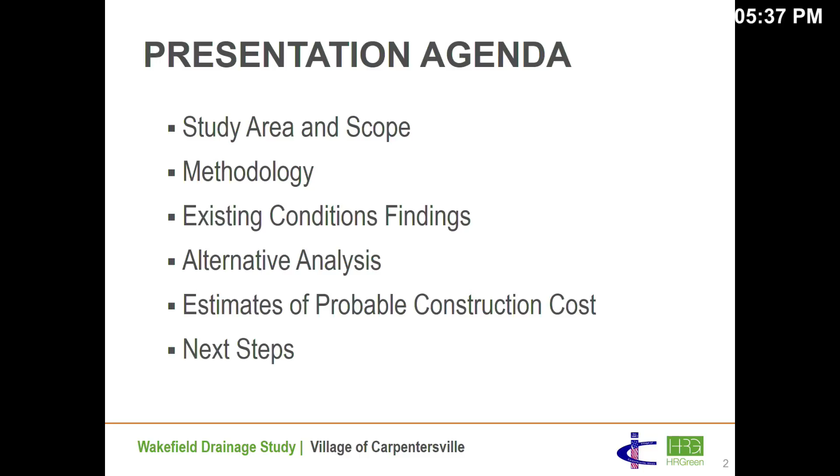So a little bit about what we will cover today: we'll go over briefly the study and the scope that was laid out for us, then discuss our methodology as to how we went about doing the study, present some findings on the existing conditions and some causes of why it floods, and some of the alternates we have looked at for you tonight. Then we'll present the different costs for the different alternates, and discuss the next steps as we move forward.

The study area we're focusing on today is the area of Wakefield and Bristol on the east side of the village, east of 25, north of Illinois 68. That star you see is really the epicenter of where the flooding is worst because it's the low point in the watershed.

All the water kind of just pools in there with no place to go, which we'll talk about more. What you also see in the pictures and on the cover slide is from the July 2017 storm event. As you can see, the roads were impassable, with about 2.2 feet of flooding in the road, so emergency vehicles and the motoring public couldn't get where they wanted to go.

From the modeling we'll present in the next few slides, this was about a 25-year storm event. You're probably aware of the different frequencies of flooding, like a 10-year or 100-year storm event — so this wasn't even a 100-year storm, it was a 25-year event. As the intensity, duration, and flow change for different storm events, the flooding can get worse.

What you also see on this map is the general tributary area, delineated by the blue line — that's how much residential subdivision area drains to that low spot. There are also some existing storm sewers, delineated in yellow, which all flow east into the village of East Dundee. That's important because when we talk about alternatives, what we can do will be limited by how much impact we can have on the neighboring community. So our intent was to have no impact at all as part of our alternative analysis.

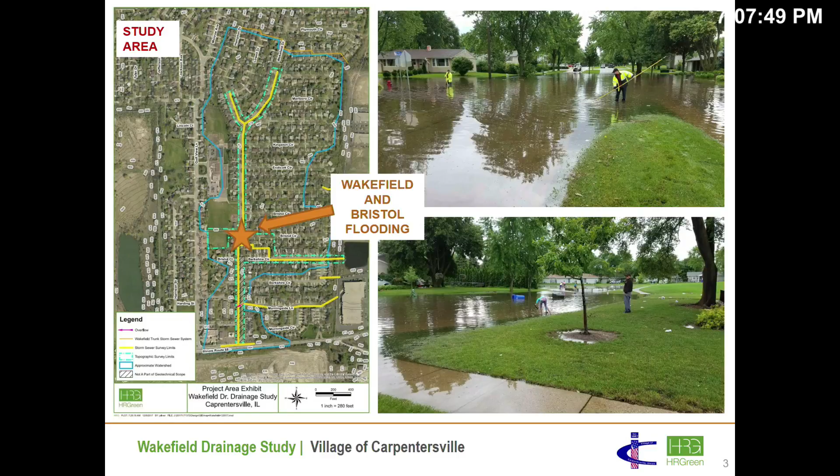Our scope generally comprised doing this study, which is what we're presenting today, and then presenting alternates for your consideration. Once you select an alternate, we'll take it to preliminary design, looking at it in more detail for utility impacts and so forth, fine-tune the construction costs, and then present the 30% plans as we wrap up this phase of the project.

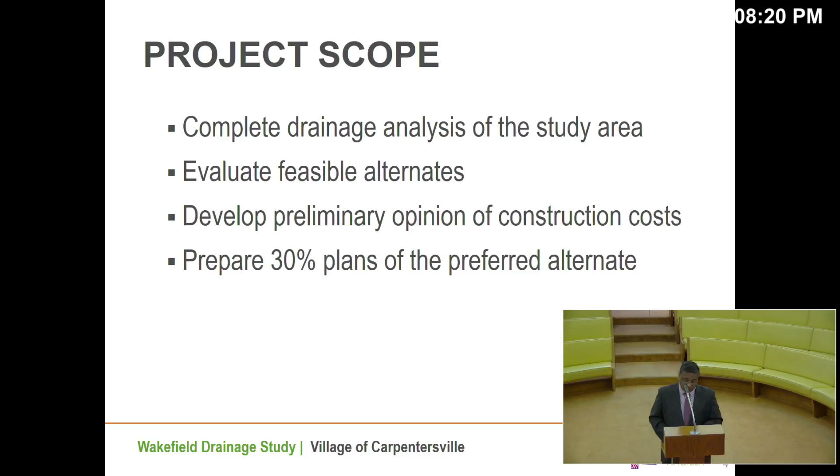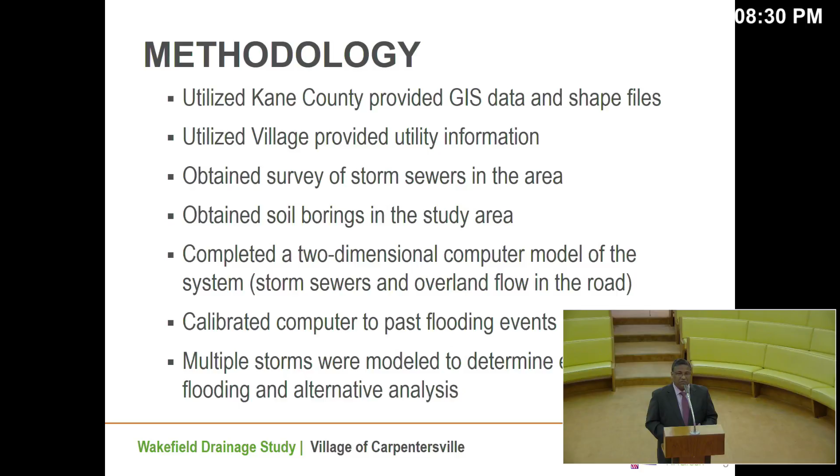As far as how we go about these studies — first, we try to look at and use readily available data. For example, the Kane County GIS data is readily available, which is helpful because we can get the aerials and topo and everything needed for our analysis.

The village staff provided us the flooding pictures you've seen — they went out there during the 2017 flood event, which was very helpful in calibrating the model we'll talk about. The village also provided us utility data in the neighborhood, but as you'd expect, we supplemented that with our own field survey.

We went out and collected field survey data on all the existing storm sewer systems, and also obtained geotechnical soil borings because we wanted to know the characteristics of the soil and whether there's potential to do something different with the flow, like dissipating it into the ground.

We also did a two-dimensional computer model — I'll present a good slide of that later. The flood depths we present require a two-dimensional model because we're not just interested in what's happening in the storm sewer, but also on the surface, in the road. As the storm sewer gets overwhelmed, where does the water want to go? What are the low points? Where is it overflowing? That's why it's called two-dimensional — you're looking both under the ground and above ground.

Before going into alternative analysis and looking at solutions, we want to make sure the computer model we're using is really good, because it's always garbage in, garbage out. If we're not confident in the model, then any solutions we present might not be validated to provide the relief you're looking for.

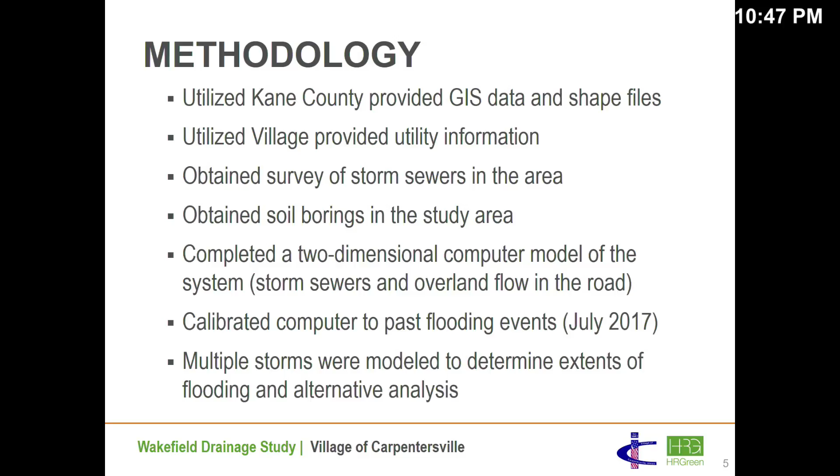So that was our general approach to looking at this. Let's look first at what happens in existing conditions.

So this is a 10-year storm, a smaller storm event than the July 2017 storm event. Before I present the inundation and what it means, there's a legend in your packet showing the different depths of flooding. As we run this model through different storm events, we look at how deep the water gets. In this instance, you can see it's about 1.5 to 1.6 feet at that intersection, represented by the legend.

As we go into other storm events, like this 25-year storm event, the depth gets deeper—about 2.3 feet of flooding in the roadway at that low point. If you ran the same model for the 100-year storm, you could expect as much as 3 feet or over 3 feet of flooding.

There are residential structures around that low spot in the intersection. Even though the July 2017 storm event was a 25-year event at about 2.2 feet deep, getting closer to the structures, none of the structures were flooded to our knowledge. But with bigger storm events, you could potentially impact the structures—we're within a tenth or two of flooding them in a 100-year storm event.

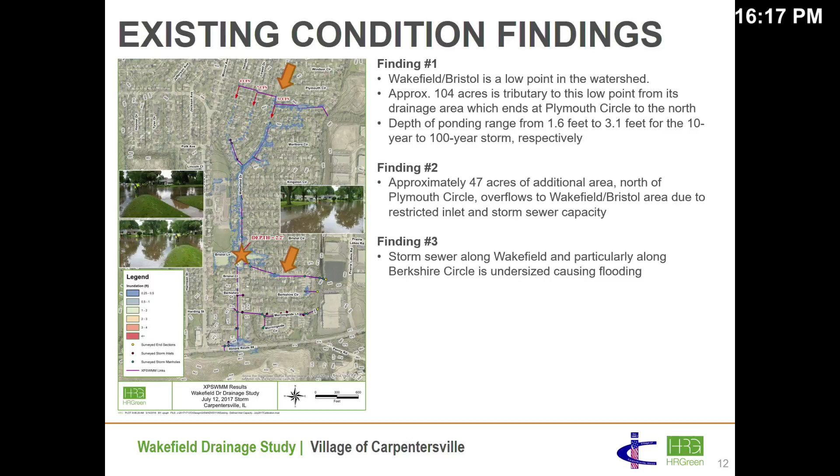Normally you have all this flow coming down, and you would expect that to be conveyed by the storm sewer system and go out into this pond into East Dundee. Well, that storm sewer along Wakefield, as well as primarily along Berkshire Circle, which is kind of the outlet for this whole system, is not big enough. It is not usual to design storm sewers to provide 100-year capacity. Normally you provide a 10 up to a 50-year storm capacity in the storm sewer system, and the rest is supposed to overland flow. But because you don't have any good place for that water to overland flow, either to the west or to the east, it just sits there until there is more capacity in the storm sewer system.

The July 2017 storm was a 25-year event, and it was about 2.2 feet of flooding in the intersection. More importantly, as you think ahead in terms of solutions, you really don't want to just design for a 10-year or 25-year event. Obviously we can address any flooding if there is enough money, but you have to balance out the cost effectiveness of what the village wants to achieve, what's a good level of protection. But the finding is that as you have more of these storm events, the flooding is going to get worse.

So the basis of design, we met with the village staff, we brainstormed, okay, what do we want to design for? Our first cut was to say, we know what happened in July 2017, so let's see if we can at least get relief from a similar type of flood in the future. Can we have a system that does not create that kind of ponding? Can we reduce it? Since it was a 25-year event, our starting point for the design was to design for the 25-year event, and also couple that with a design so that if there was a 100-year event, at least we don't impact any structure, so the water isn't getting into somebody's basement or home.

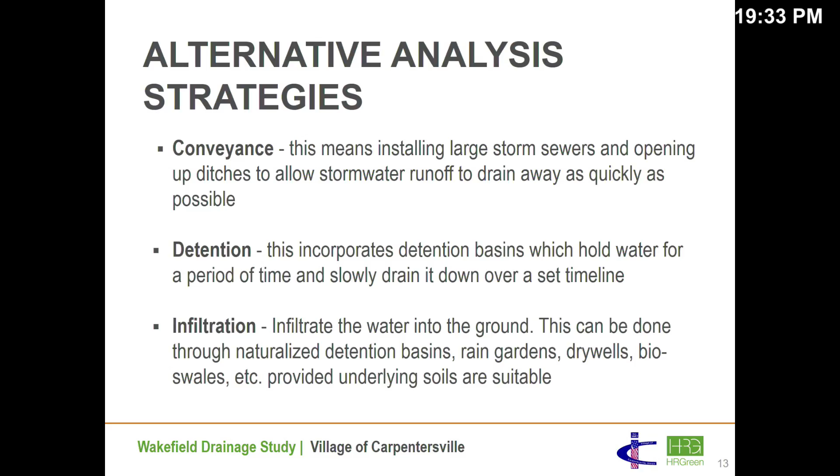So alternate 1 was to look at the opportunities of available vacant lands and what we can do with that. As you saw in some of the previous flood pictures, let me go back to one of them real quick. This was a 25-year event. As you can see, the water tends to not only pond in the intersection, but it also floods the vacant land to the west. Well, can we do something with that?

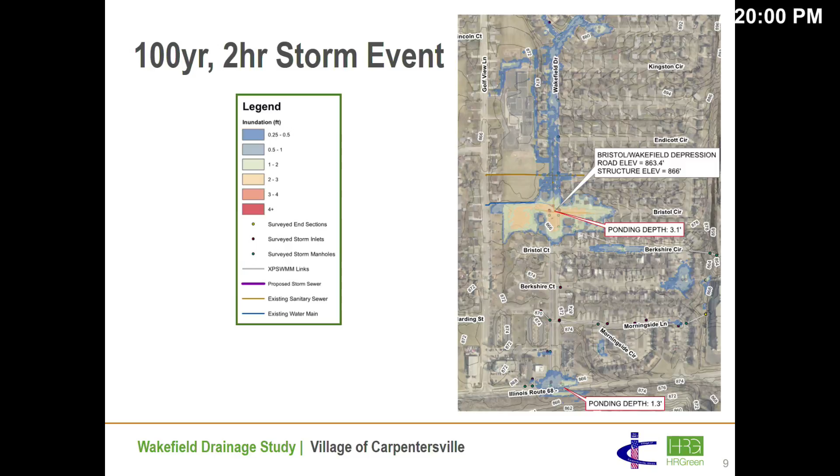Because it's not ponding as much right now, there isn't enough infrastructure for the water to go from the intersection to the west. So it really ponds more in the intersection than it ponds in the vacant land. So, well, can we do something with that?

That was one of the thoughts we had in developing alternate one. As you can see, we're using these vacant lands both to the south and to the north of Bristol Lane, which is the village's right-of-way, and also building a new storm system. There's an area up at Wakefield and Kingston that floods too, so we were putting in a storm sewer system there and rebuilding this storm sewer system with a larger pipe so that all that water along Wakefield can get down to the intersection.

In other words, all this water that is ponding in the intersection, we are taking that and moving it to where there is opportunity to store it.

The bullet points here kind of go through this. So we're looking at about 7 acre-feet of detention on alternate one. There's also some flooding up in this south area, so we're proposing 1.5 acre-feet of detention just north of 68 and east of Wakefield.

We'll talk more about detention as we open it up to questions. But one of the good things we also discovered by doing the soil borings is that the underlying soils are really good for infiltration.

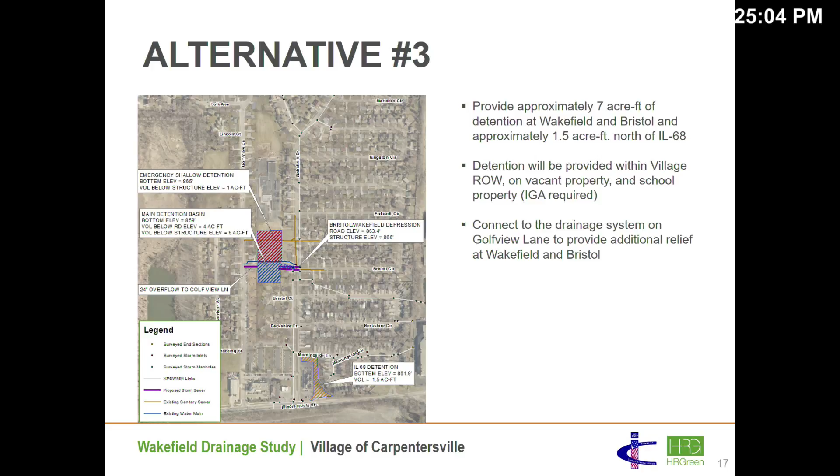The big difference in cost between 1 and 2 is upsizing the storm sewer on Wakefield. Yes, that's the biggest delta, because my colleague Jared Oliver has been working on this project with all the modeling, so I forgot to introduce Jared.

Sorry for jumping ahead, but what's very important to me is: is this a permanent solution, or a temporary solution? How many times will we be digging up that area? That's a lot of money for this to get fixed, and if it's not a permanent solution, I'd rather us find a permanent solution than a Band-Aid, because the residents don't deserve a temporary fix with that kind of money being spent.

And it also states partial road flooding. I need to understand what partial means. Is that 3 feet, 4 feet? What's partial road flooding? I'll get into that a little bit if you just allow me to go through some more slides.

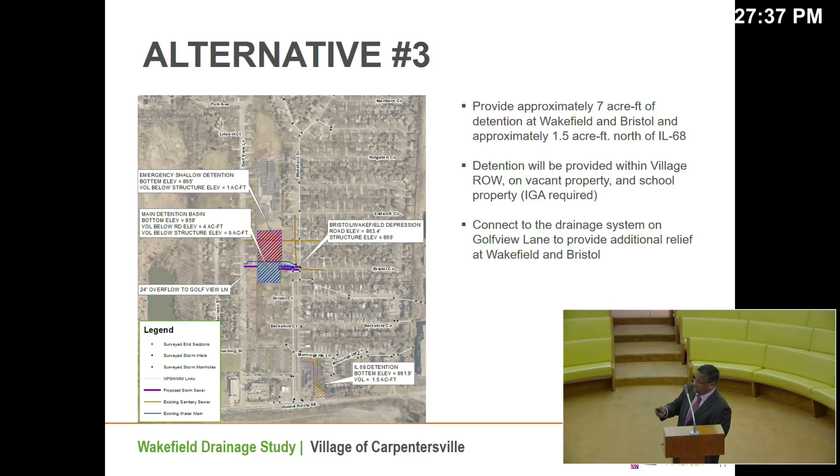But the issue is that when you replace that storm sewer system, not only does it become exorbitantly expensive, now you have to mitigate the impact of passing that water onto East Dundee. The water currently being stored in the road would now get conveyed pretty suddenly to that pond right there -- not shown in this picture. That pond would fill up quickly, and someone would complain: I never saw this water, now I see it, and my water level in the pond is 3 feet high. That's a negative impact.

So we're trying to balance the potential liability with providing relief through a design you're comfortable with. As I said, the basis of design was to relieve and reduce the extent of flooding rather than eliminate it in all storm events. It's not unusual for a 100-year storm to pond in the road to some extent.

You also have to realize it does flood, but because there's a system in place, it recedes pretty quickly too. So can you live with 1.5 feet of ponding instead of 3 feet, at which you could at least try to get emergency vehicles through? That might be something to think about. That's kind of what we're presenting here today.

You said alternative number 3 did not address the Kingston issue -- is that what you said? Yes. So that's why staff is recommending an alternate that will address that. I think our residents would like to see us address that area.

Again, when we look at these alternates, we present a whole host of feasible options. And as you'll see, it basically makes no sense to do alternate 3, because the costs are pretty much the same between 2 and 3. So why wouldn't you address Kingston?

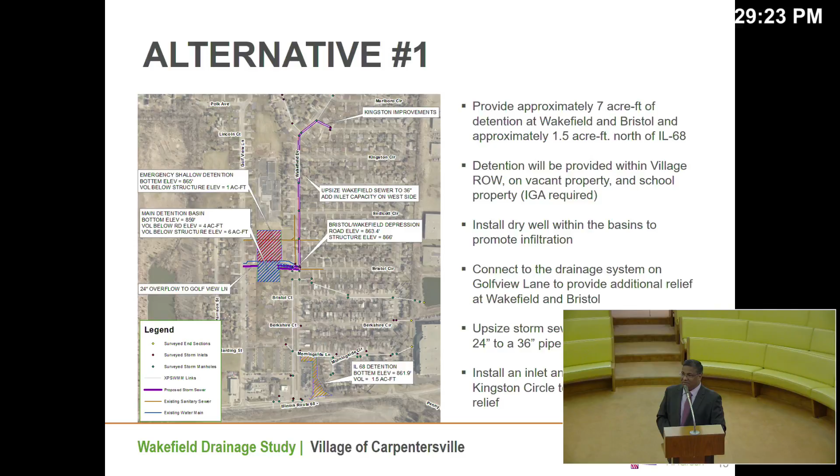I think the concern about the water in the pond isn't really a concern when the water's not ponding in the road, as far as I'm concerned. So which I'll get to.

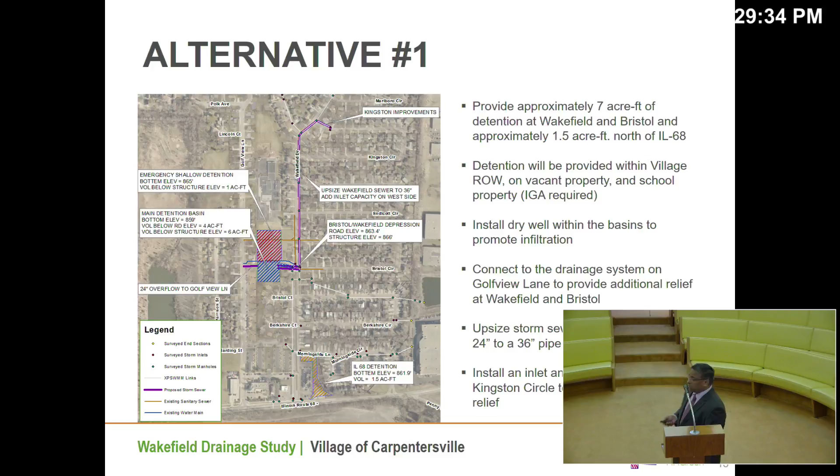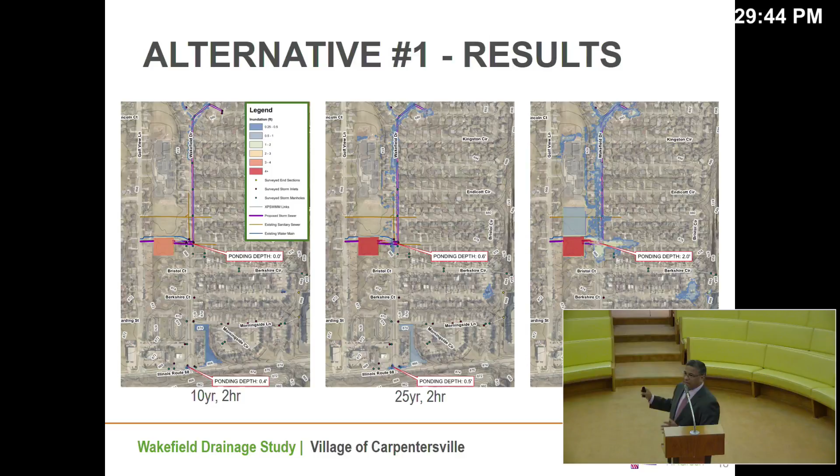So I've presented all 3 different options and what the variation is. Now let's look at what happens if you implement alternate 1.

So in alternate 1, if you look at the 10-year event, remember this picture: there is no water in the road. In the 25-year, there is very minimal water in the road, about half a foot of flooding. But compare this 25-year storm event to what happened in July 2017.

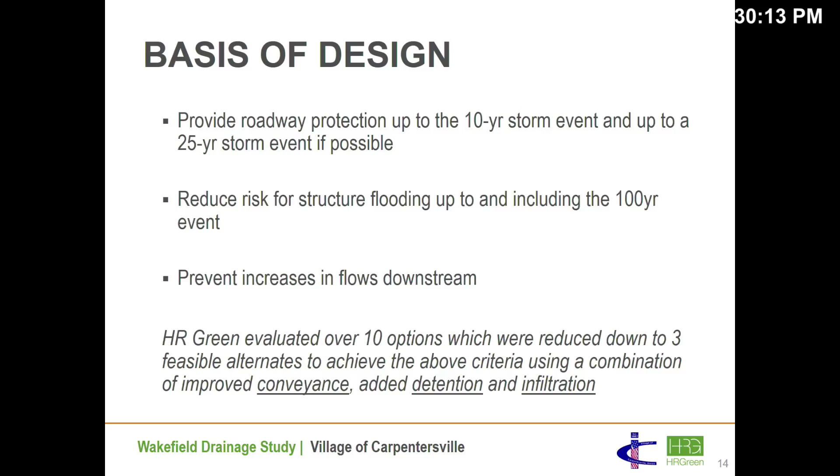Well, you see that there is no water in the road with our solution of alternative 1. Now alternative 2 and 3 might look a little different, but I think we've made a huge improvement over existing conditions regardless of which alternative you choose, because providing that storage to the west is really taking all that water that used to pond in the street to where you can manage it on vacant lands. So the 100-year event is still getting into people's backyards and front yards, and getting pretty close to structures, which I say is too close for comfort. As you look at the solutions and alternatives, the 100-year is getting improved, but not to the extent that I can say there will be no flooding.

Just to help us conceptualize this a little better, could you elaborate on how much rain exactly, in inches, you modeled for the 10-year, the 25-year, and the 100-year alternatives?

So there are theoretical values that have been published by the Illinois State Water Survey. A 100-year, for example, in this area is about 7.5 or 7.6 inches of rain. A 25-year is probably close to 5 inches of rain. A 10-year is close to about 4 inches of rain. So it is a lot of rain.

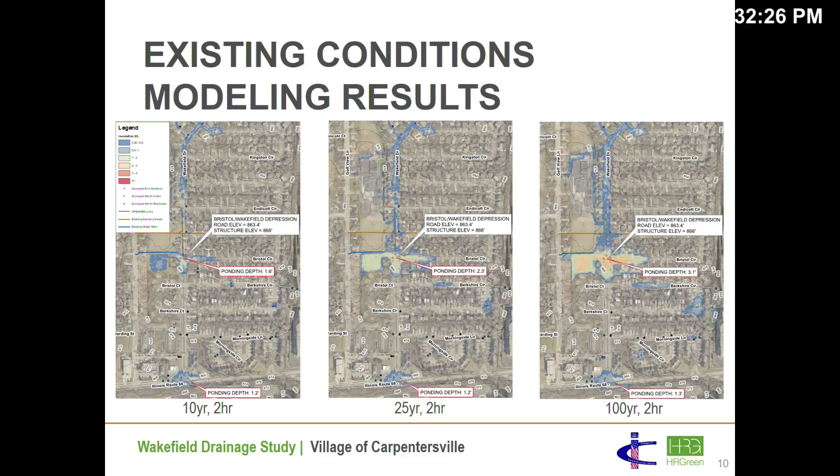So in this 10-year and 25-year event, this intersection looks pretty good. Now as you go up, depending on the storm event, you will see some curb line flow, which is normal, because our model reports anytime the depth gets to a certain level, about 2 or 3 inches, that we were modeling. So there is some water in the road, but it's just flowing down the curb line.

And then in the 100-year event, going back to this legend, in the 10-year the flow comes down and floods or stores in this area, with a depth of about 3 to 4 feet in this pond. As we get into a higher storm event like a 25-year event, we're getting a little deeper into the pond. The way it's designed is that if you get a 100-year storm event or close to it, it'll start to overflow into the area to the north, which is the school property. We'll talk about that.

And then as it ponds into these two vacant lots, or vacant properties I should say, it also allows that water to go west to Golf View Lane. Now this is alternative 1, so this is the Cadillac, I guess, of options.

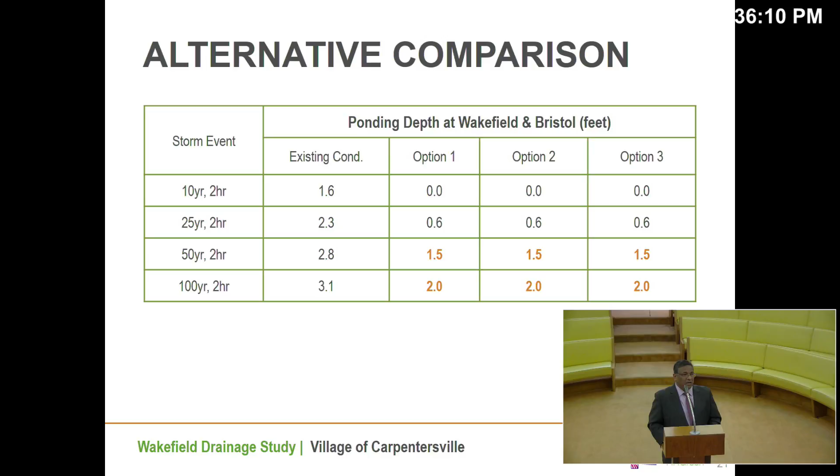So just a quick snapshot of the comparison of depth. In existing conditions, you had anywhere from 1.6 feet of ponding in the intersection to about 3.1 feet. Our maximum ponding is about 2 feet. Obviously that's still a lot of water, but it'll just go over the curb and stay in the parkway area, generally by the sidewalk. It still doesn't get anywhere close to what it would if you don't do anything — you'd be looking at getting pretty close to the structures in that situation.

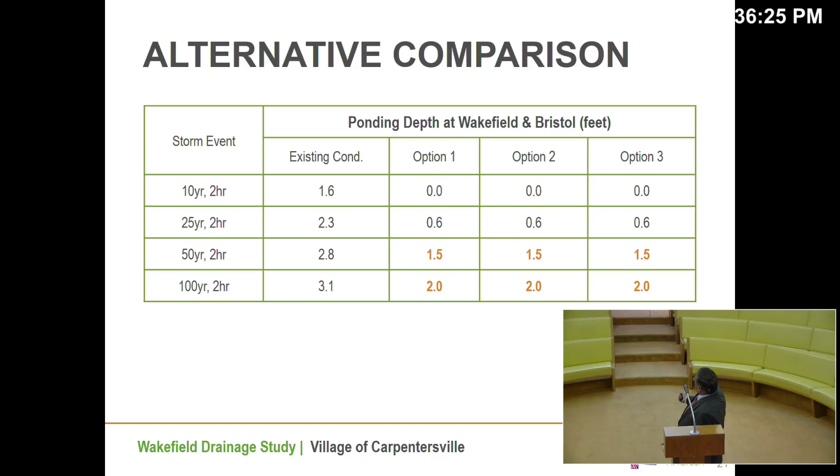And the good thing here is that whether we look at alternative 1, 2, or 3, the 50-year protection is about the same, and the 100-year protection is about the same compared to the existing.

And then we ran these alternatives through a series of questions. What does each alternative do as we look through it? As I said, the basis of design was: does it provide the 10-year protection for the road? Each one of those alternatives will do that, which means that in a 10-year storm event, your system should function pretty well compared to existing conditions.

Would it eliminate the curb line flow you experience going north along Wakefield? In the 10-year storm, it will, because we're putting in a brand new system going north and adding new inlets. But in alternatives 2 and 3, there will be some curb line flow — as you drive along major roadways or local roads in a major storm event, you'll see some water along the curb. The question to ask yourself is, if it's ponding a little along both curb lines but you still have a travel lane open in the middle, is that good enough? That's a consideration the board should have as you look through the different options.

Does it reduce or eliminate structure flooding for up to a 100-year storm event? The good news is that no matter which alternative you pick, we're comfortable saying that for up to a 100-year storm event, based on the modeling and inundation we've developed and the calibration confirming it was a good model, you should have a lesser chance of structural flooding than in the existing conditions.

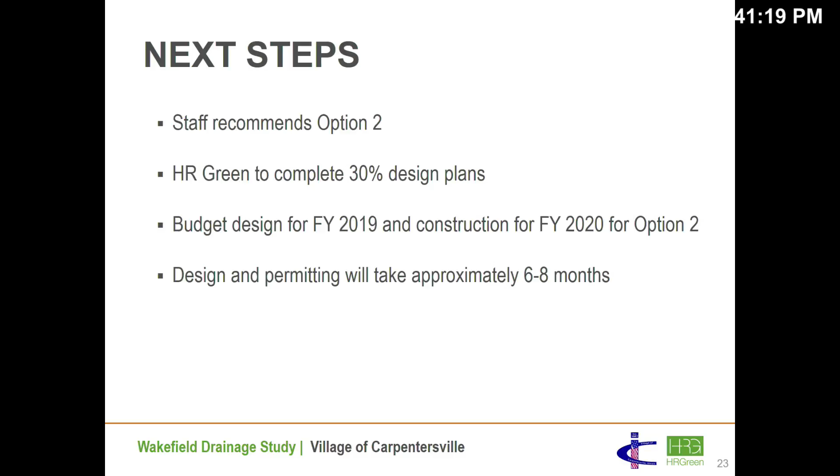Okay, well, in the 10-year event, you have 1.6 feet of flooding at the intersection. This is all ponding depths taken at Wakefield and Bristol. So in the 10-year event, you can see there is 0 feet of flooding at that intersection. In the 25-year event, which was your July 2017 storm event, you have a pretty significant reduction, going from 2.3 feet to about 0.6 feet of flooding. That's a pretty good reduction, given the fact that you're trying to also balance it with having no impacts downstream. The 50-year is a reduction of about 1.3 feet for all the different alternates. And in the 100-year 2-hour storm event, you're going from 3.1 feet to about 2 feet.

Sorry, Kevin, so your point is regardless of which option, you don't essentially change the ponding depth? So regardless of how much money we spend, we're not going to effectively change that?

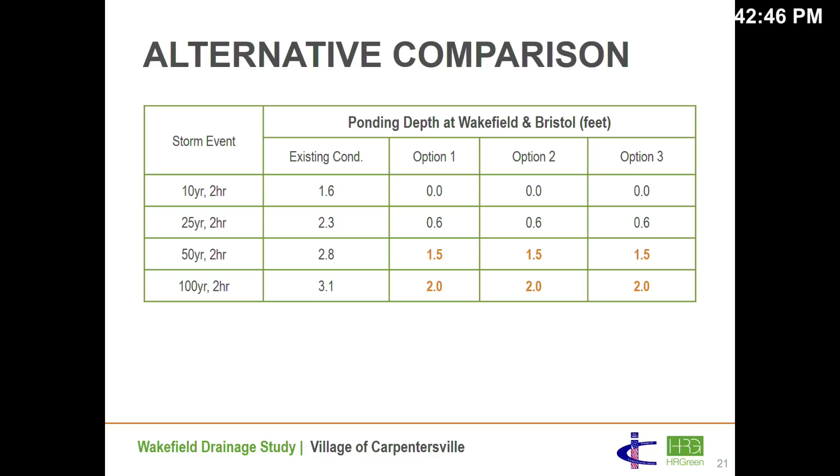Yeah, yeah. So option 1 is 1.8 to $2 million. Option 2 and 3, go back to that same slide, Ajay, option 2 and 3 are only $1 million, but all 3 options show the same benefit. That's why we're recommending option 2, which also relieves the flooding up on Kingston.

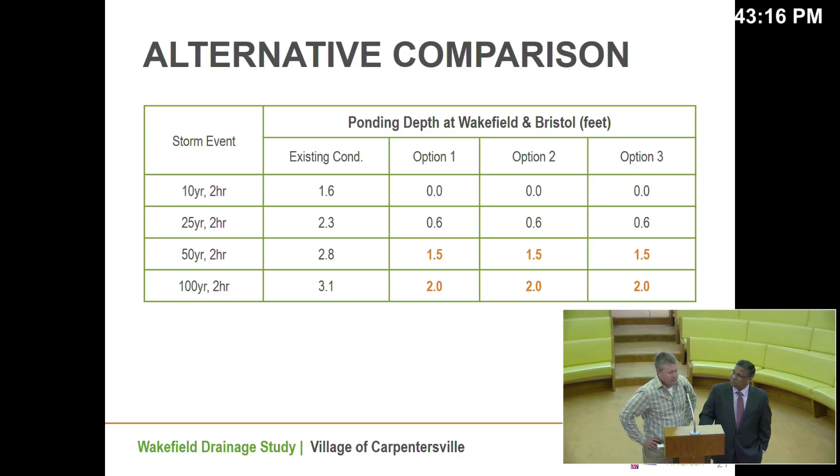So that's the staff's recommendation. But my question is, with alternative 2 and 3, it's saying partial for alternative 2, and for alternative 3, it's saying no. That's the flooding along Wakefield, so that's the water you see coming down the curb lines, coming down Wakefield. So for an extra $1 million, you could reduce the curb line flooding down Wakefield, down to the actual Bristol and Wakefield intersection.

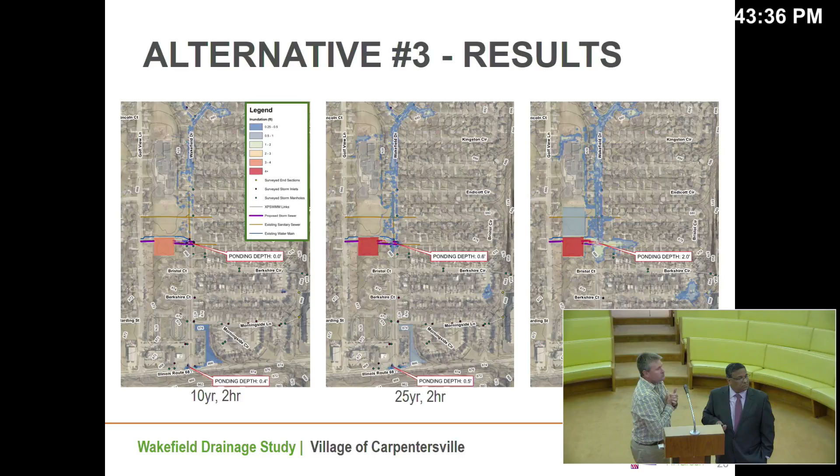Then why wouldn't alternative 3 be cheaper? I'm just trying to figure out why, with the two alternatives, we have partial and no, and the price tag is the same. So I'm kind of curious as to why that is. Because the storm sewer at Kingston is so minute, it may only be $50,000 to do that additional storm sewer in option 2.

So then where's the additional—I see the little star here, costs related to final design and property acquisition easements not included in cost estimates. So this isn't the final cost—how much more are we adding to that total?

That's where we don't know. The village does not own the property south of the school. We don't own the school property, so we'd have to do basically an IGA with the school district to allow us to use their property, and go into land acquisition to try to acquire it. It's 3 parcels south of the school. The parcel all the way to the south along 68 and Wakefield by Morningside, the village actually owns that parcel. So that's the only one—I think it's actually maybe 2 parcels.

Is any of that vacant land in private hands, or is it all in government entities? The 3 parcels south of the school are privately owned. So it's not all school board—correct, some are private. Correct. That could get interesting. Yeah, but those costs don't change based on what option either, so it's relative.

The cost of improvement. So Ajay, I'm sorry, I'm looking at this, I guess I'm lost. You're gonna, option one, you're gonna put in a massive storm sewer, but it doesn't effectively change the ponding depth, right? So help the dumb guy out here to appreciate why.

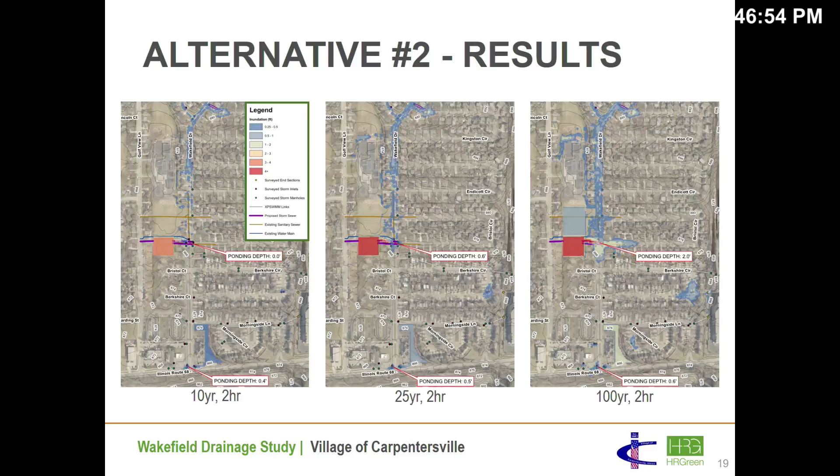East Dundee. Oh, okay, so that's one where there'd be a conversation with somebody there, right? That pond would fill up deeper than it did before. We'd have to have a conversation with somebody over there, yes. Right, this pond is a privately owned pond, in the villages.

Much bigger diameter. Yes, so these are all unknowns. Yeah, we did look at that option. We sized this to see how much bigger the pipe needs to be on Berkshire to get all the flow out, so we can present you some data on that too. But the challenge is gonna be, what do you do further east when you look at the impacts to that pond?

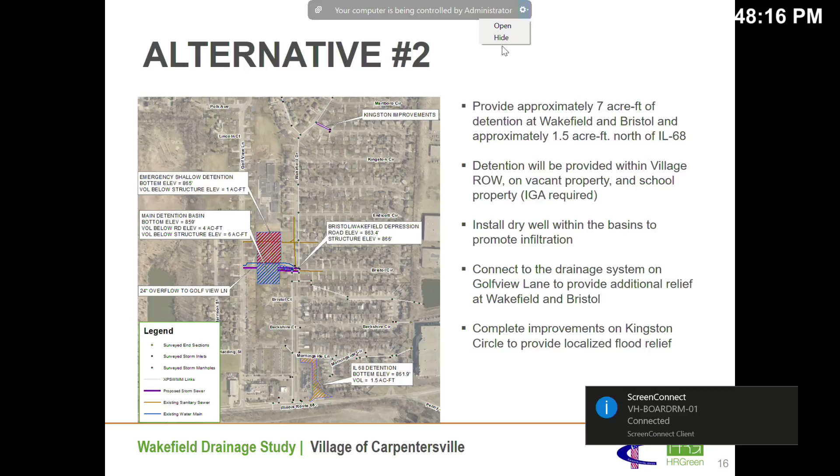Correct, so I was going to ask Bob why we picked option 2, but now I get it, it's $1 million less for roughly the same thing-ish. Exactly, it's complicated. If it was easy, you'd just know which one to go with.

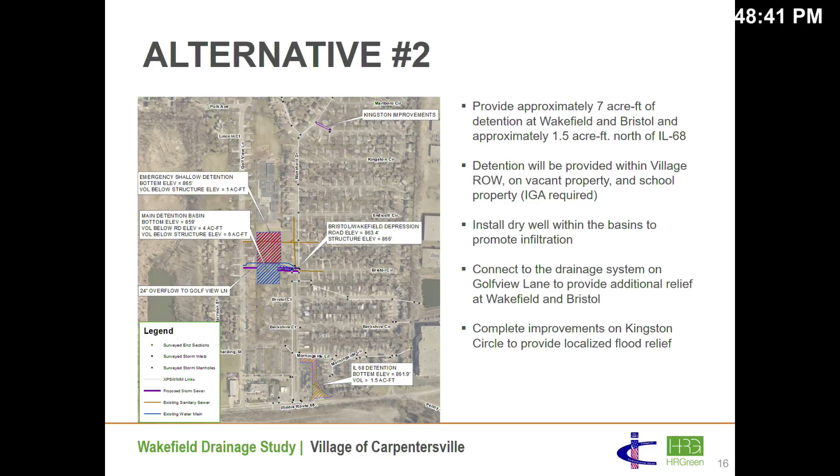Now, one of the things that should work in our favor, and we have accounted for some of it, but we did not want to be overly aggressive in our design, is that the soil types we have encountered are really good. Based on what we did on Golfview, we've had several major storm events and no flooding because of the infiltration trench we dug out there. So we are still going to do that here. We're expecting the relief of water infiltrating into the ground to be more than what we are estimating in our design.

But again, that's where we make an engineering judgment not to overly estimate what that can provide. So these are probably conservative estimates of the depth of ponding, but I will not stand here and say that if you chose alternative 2, you will have 0 feet of flooding in the roads at all storm events. 10, 25, and 50-year storm events are generally what you experience more frequently, and 100-year storms are becoming frequent enough too.

As you pointed out, we started out hoping that we would have a solution that can address flooding all the way up to a 100-year event. What would be embarrassing is to authorize monies as a board, have a project, and then have the streets still flood, and people say all that money was spent and we still got flooded.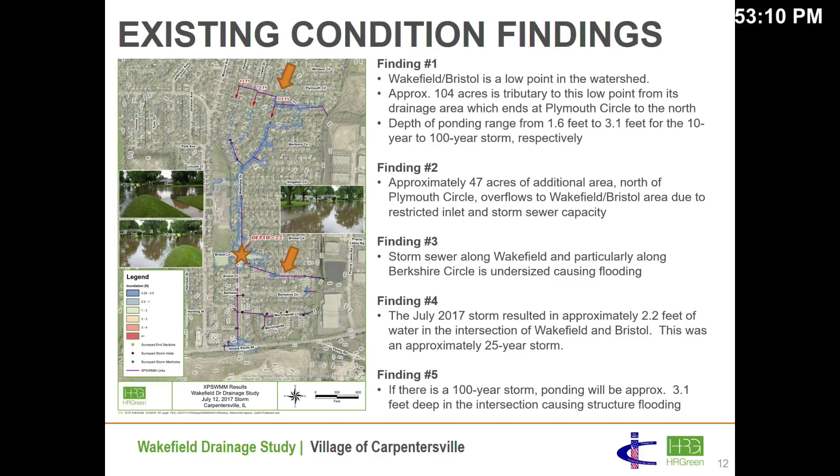One thing we did not look at in detail is that area to the north, that 47 acres that I talked about, that also comes down - what level of improvement. We did talk with the staff about whether we can improve that area to the north and add more inlets and storm sewer up to the north watershed so that flow does not come down to Bristol and Wakefield. That's something we can extend our analysis on. But the issue also still kind of remains that this area, before it can go overland flow to the east or to the west, is just deep enough and low enough that it will have some level of ponding unless and until you replace the storm sewer system going to the east into this pond in East Dundee.

We can model that and tell you what that pipe is going to be, because we have that information. If you would direct us and the staff to go talk to the village and see what they're willing to allow the village to do, we could come up with even a solution that has no depth of flooding for all storm events - we can definitely look at that. You don't have that information now, so - I don't have that right now.

I'm sure that's - so I guess we'll regroup and hear a total solution, whether it involves that 47 acres overland flow to the north and then going to the east. Yeah, we'll be happy to take a look at that. Those are two things we can look at. But I do know, and Jared, correct me if I'm wrong, do you remember right off the bat how much the depth reduced down to if you were to replace the storm sewer on Berkshire?

I don't remember the depth for sure. We modeled 48 and we got a reduction. I think because we didn't want to negatively impact East Dundee, we kind of didn't chase that all the way. And also, one thing to know, we'll definitely look at that and come back to you. Because this is a low point, the topography does go up high as you go east, and then the storm sewer will become even more deeper as you try to look at options to replace that. We have to look at it, though.